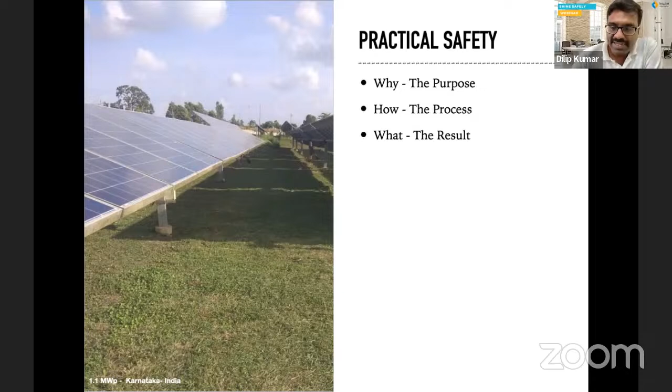I think most of us know the why. I don't have to explain why we need to have safety embedded into our day-to-day operations. The main reason is the growing install base. We have close to 71 gigawatts of installed solar PV plants, of which 80% is ground mount or utility scale solar PV plants. And most of you who have joined are aware of the challenges or different kinds of injuries that we have faced while operating solar PV plants.

We are not going to talk about safety during the construction phase. We are purely going to talk about the challenges we face post-commissioning, during the operations and maintenance life cycle of the solar PV plant. Many have spoken, and there are well-defined processes to take care of construction-related fatalities and injuries, but there is less or no focus on managing fatalities or injuries during operations of the solar PV plant.

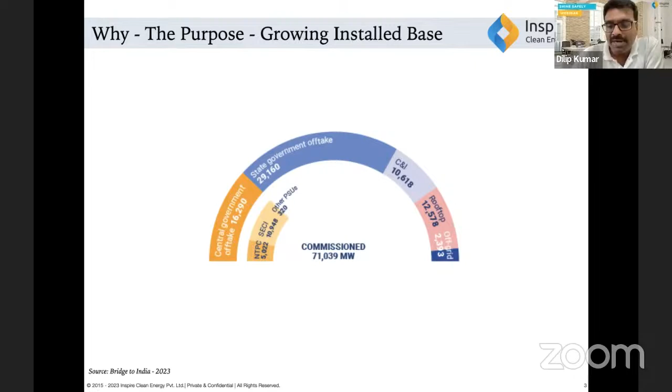So the main concern or the main purpose is the growing installed base. How do we handle the growing installed base, and how do we operate them in a safe manner?

The second major reason is that before the law comes into picture, there are suo motu cognizance being taken up, different organizations addressing unsafe work practices and accidents happening in factories, and making sure rules and regulations are formulated. So today we cannot wait for a law or a rule to come to follow safety. Either our customers are asking us to follow safety, or the fund which has invested into these solar assets is asking us to follow safety, or, just like in this case, the National Human Rights Commission sends notice to center and state asking why safety is not followed properly.

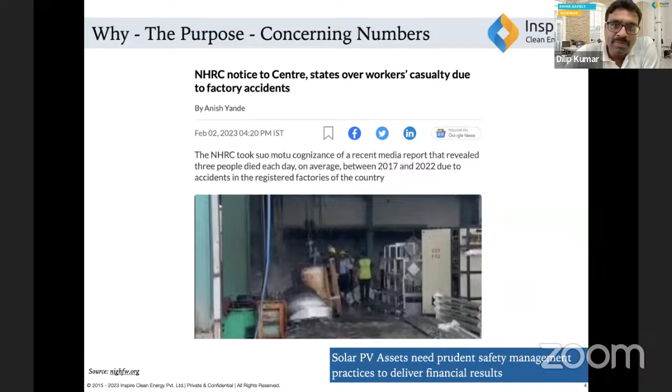So we cannot work in the normal way - chalta hai, let a rule come, us samay dekhte hai. Those kinds of philosophies don't work. We have to be one step ahead, think about tomorrow, and plan today.

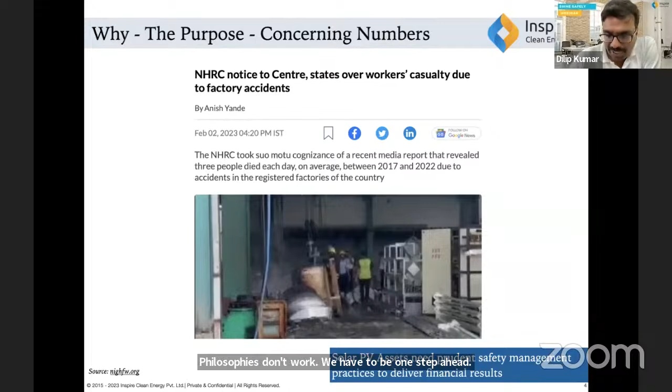In addition to this, the major challenges, work-related illnesses or injuries cost close to 12% of GDP loss. If there is a loss because of injury or illness, they are costing us in billions. Not just injuries and illness, but if a team member gets hurt or injured, the whole morale of the remaining team gets affected, the work gets affected, and the cost of disengagement is very high.

So unsafe work conditions and poor EHS policies not only lead to human loss or resource loss, but it also impacts economic viability of the project or the organization which is employing the team.

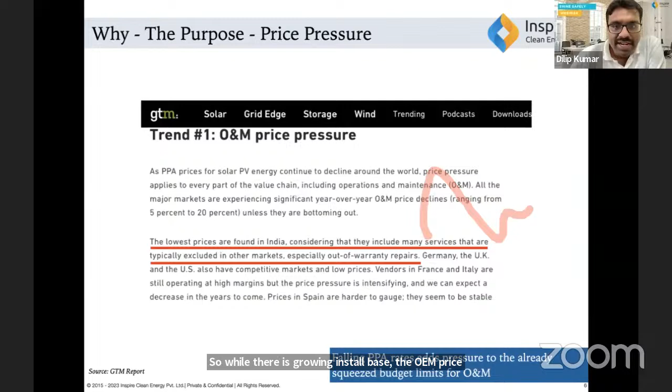So while there is growing install base, the O&M price pressure is pushing us to a situation which is very hard to manage, right? And because of that, what happens is you have safety like this.

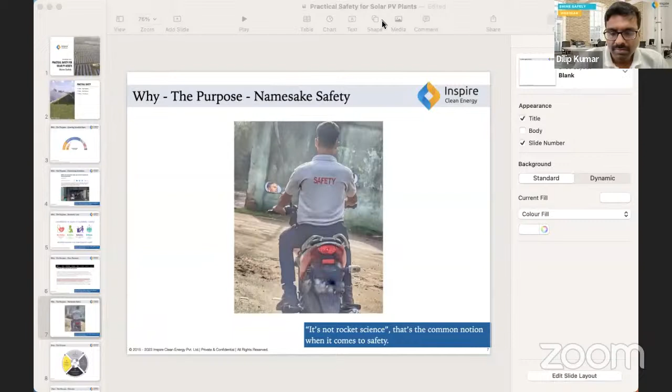Just a minute, I am not sure why this is not... I want this to go up. I hope you guys can see. Yeah, we can see, just a minute. Okay, so I'm still not able to move this guy out, I don't know why.

So anyhow, the point is because of this price pressure, safety has become a namesake entity. People are following safety just because we are forced to follow safety, or just because an audit is happening, or just because a customer is asking us to submit a set of documents. So this is a classic case.

I took this picture this morning when I was coming to the office. This young chap is well dressed, having his safety shoe on and wearing a safety t-shirt provided by the company to emphasize to him that work safety is important, work safety is important. But this gentleman forgot about the helmet. So that is how safety is implemented today in most solar PV plants. They are implemented in letter, but not in spirit.

So how do we go about this? How do we change this whole situation from namesake safety to practical safety? Most times safety is not implementable because it is not practical. So the major challenge that we have to adhere to, or we have to look at, is how do we make sure that safety is practical and deployable.

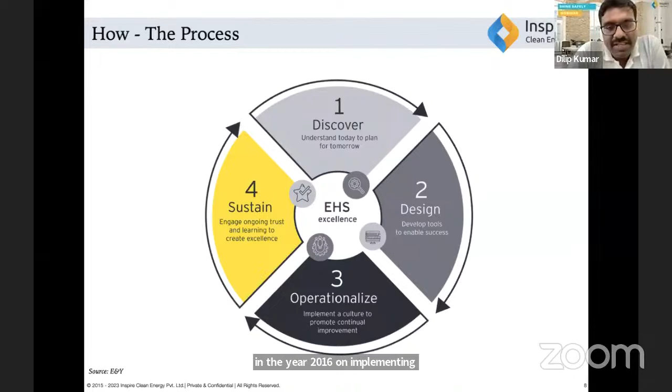So when you look for these terms, practical safety, Ernst & Young had come out with a wonderful analysis in the year 2016 on implementing occupational safety at work sites. So they gave this EHS excellence metrics, and they said every company has to go through this 4-step process, and this has to be a continuous improvement process.

They say you have to discover pains of today so that you can plan for tomorrow. You have to design processes and tools to enable that it is successful, that is, it is not namesake, but it is successful. Just not penalizing, but enticing team members to follow it. Third, to operationalize it and make it as a culture and habit, rather than having a safety policy stuck in a place where nobody has a clue about what the policy means, what the word means, and what is the essence of it. Make it operationalized.

And fourth is to sustain them by continuous learning, training processes, and identifying new hazards or new challenges or loopholes in the existing system so that we can be better. This is the process EY shared as part of their reporting as EHS excellence in the year 2016.

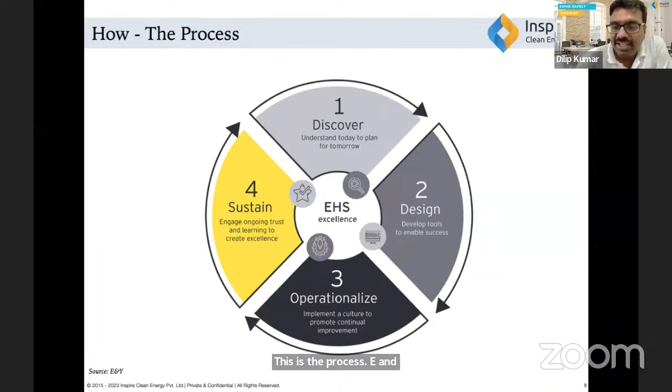And we took this survey before we started this webinar plan, and we asked the industry: what is the major challenge you see? What is the major reason for an accident in a solar PV plant? I guess most of you, even in this participant list, would say it is DC, which is most hazardous.

So that is where the major challenge is. When you don't understand where a hazard exists, then how will you plan or strategize your safety policy or your safety processes to avoid the hazard? So this was a major eye-opener for us when we implemented EY's EHS excellence into ICE operations.

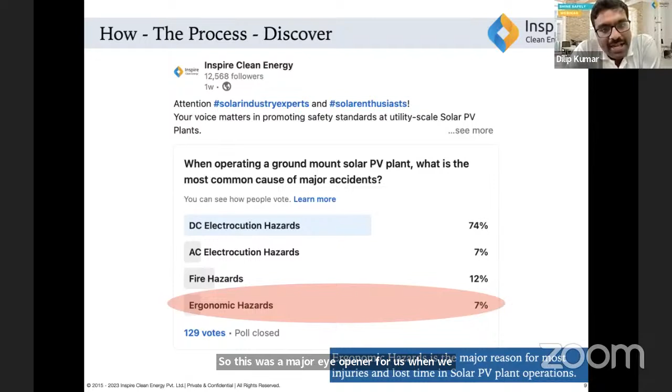So we brought in this methodology, hierarchy of controls. Most safety professionals are aware of this hierarchy of control: elimination, substitution, engineering control, administrative control, and PPE. But the important essence in this hierarchy of control, which most miss, is the effectiveness of them.

As clearly shown in this diagram, elimination is the most effective method of removing a hazard, and PPE has the least effectiveness in protecting you from an injury or hazard at site.

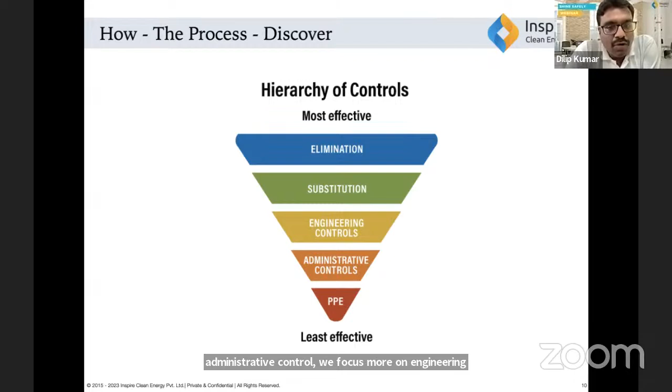Unfortunately, we are doing this pyramid in exactly the opposite way. We focus more on PPE, we focus more on administrative control, we focus more on engineering controls, and we don't focus on substitution and elimination.

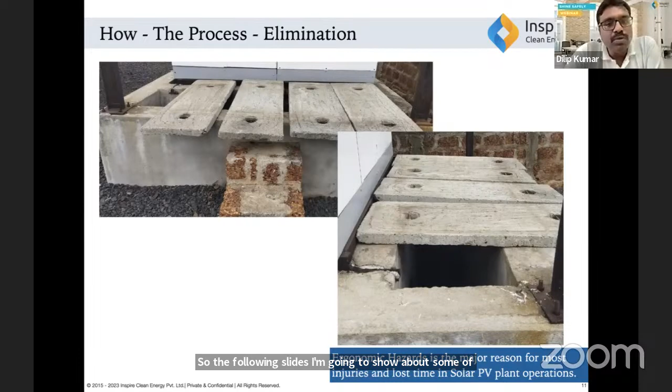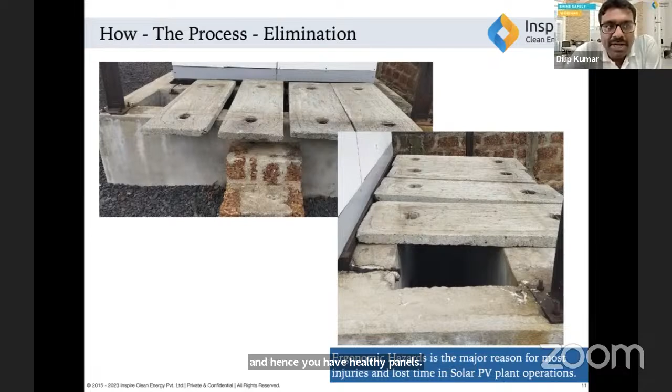So the following slides, I'm going to show some of the ergonomic hazards which are causing problems at utility sites. You would have seen such installations where you have a trench where you have put up the central inverter or the LT panels. Nowadays most utility plants have string inverters, and hence you have LT panels. You don't have enough space for the team to do preventive maintenance or corrective maintenance.

These injuries, these hazards can be easily managed when the solar plants are designed properly. You can look at this picture: the footstep size is so small that a person carrying a tool cannot walk on it or step on it stably and reach up to the platform.

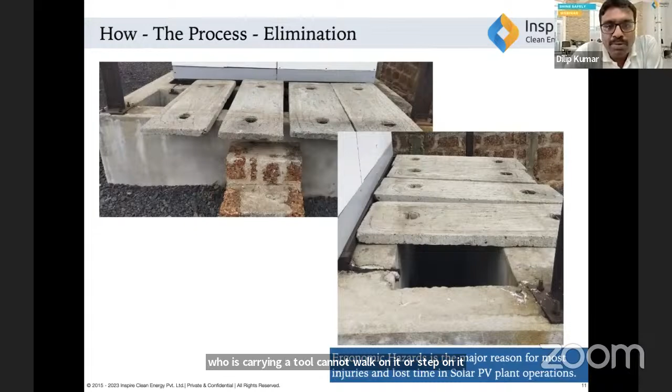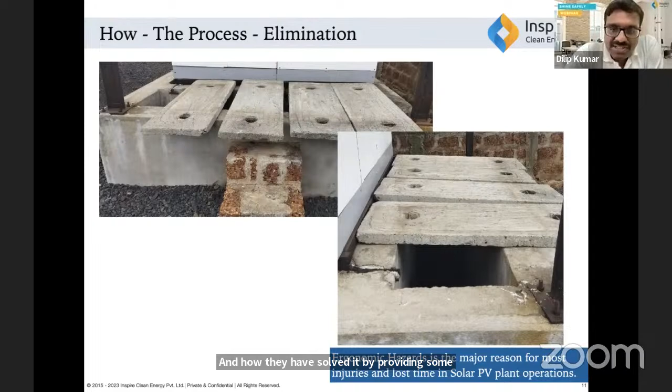And how have they solved it? By providing some slab, which is again much more dangerous. So the biggest challenge is to eliminate these hazards during the construction phase or the design phase itself.

And most of you would have seen such installations with string inverters becoming popular in utility scale plants. They are installed below the tables, and there is not enough space to do regular corrective or preventive maintenance.

Say, for example, if you send a team to do string current measurement, how will they do it here? There is no visibility of which string they are measuring, whether those strings are open, whether those strings are properly connected. They will connect the clamp meter, and when they accidentally shake it, there is a possibility of a short circuit, which is going to cause a fire or a DC electrocution.

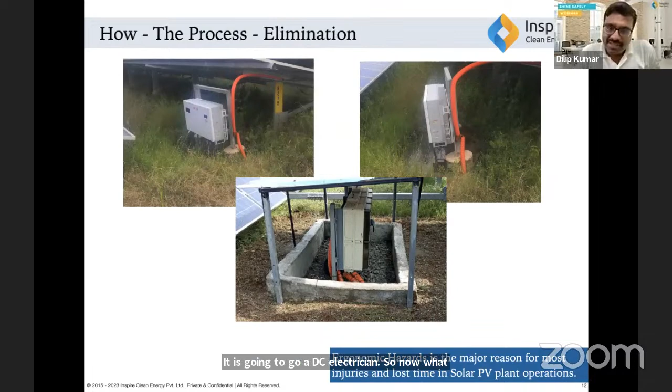So now you will say DC electrocution is the biggest hazard, but actually it is the ergonomics which has caused the DC electrocution hazard to occur. So this common sense approach of looking at the challenge is very important in having practical safety implementation at site.

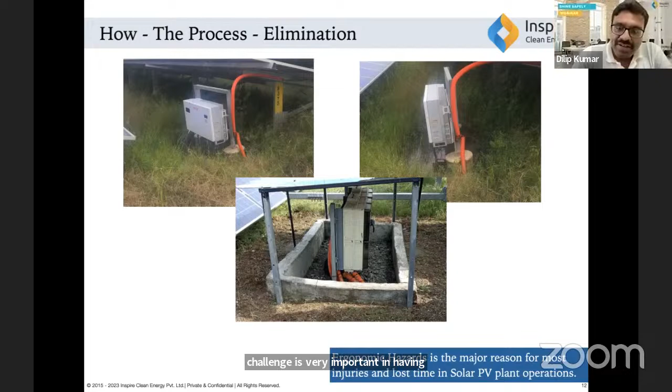The second most important activity done in a solar PV plant is vegetation management. Here you cannot take elimination as a route at all; the only possibility is to use substitution. Most times you see laborers manually cutting or removing vegetation to control the abatement.

Instead of going for easier methods which could reduce the hazard, we don't use them. We simply want to deploy more resources and cover it, or in the worst case, we spray chemical weedicides and make the environment much more polluted. So methods like easier, environmentally friendly substitutions are not being considered in solar PV plants.

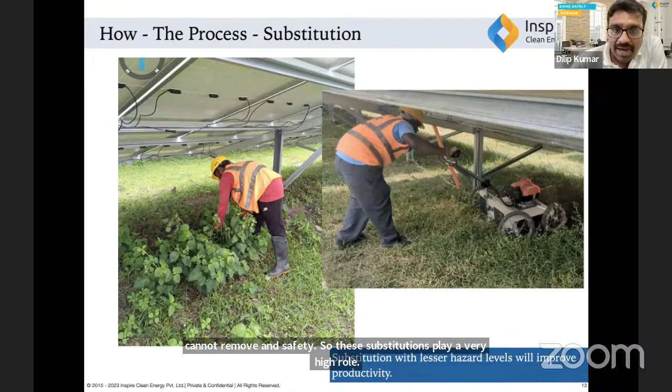So these substitutions play a very high role. It will improve productivity. The team morale will be high if you look for such substitution.

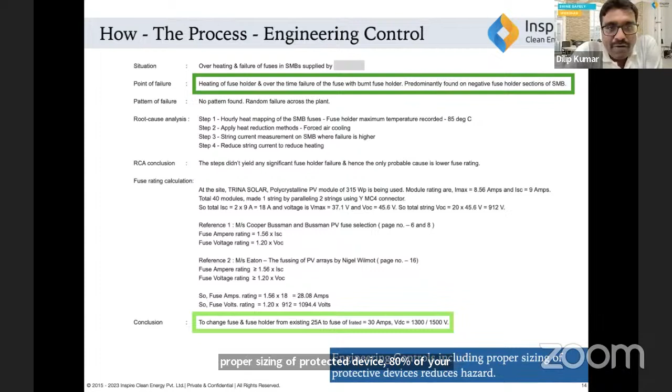The third most important hierarchy of control is engineering controls. Most times you have DC problem and AC problem because of improper sizing of a protective device. You have an improper MCCB, an improper sized cable, an improper sized fuse, or improper crimped MC4 connectors. If you have proper sizing of the protective device, 80% of your DC and AC side faults can be eliminated, along with DC and AC hazards.

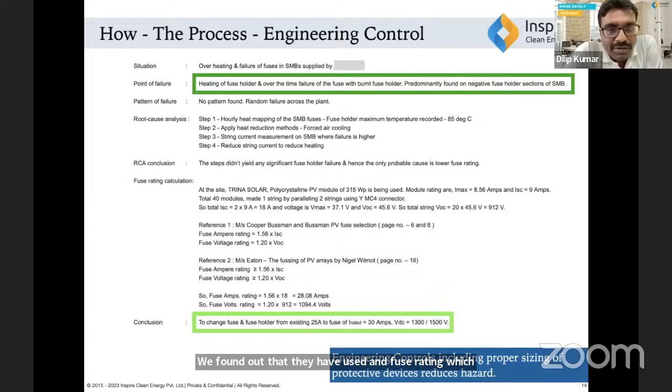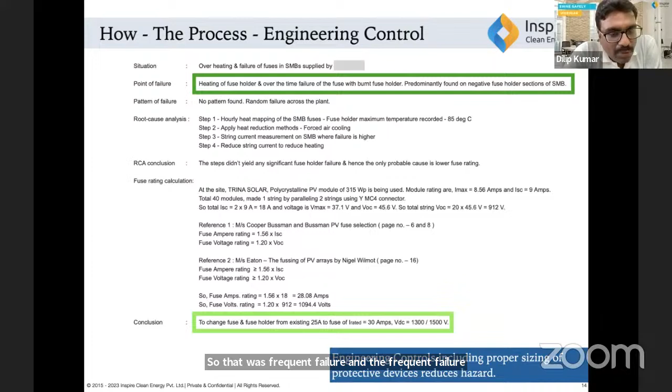This is a classic case of a new project which we took over as operations and maintenance team. We found that they had used a fuse rating lesser than the actual rating needed for the system. So there were frequent failures, with the fuse holder burning. If you don't attend to it with a technical mindset, one day the whole SMB will go on fire and we will say it is a DC hazard. Actually, it is not a DC hazard. It is an improper engineering control hazard, which has led to a DC side problem.

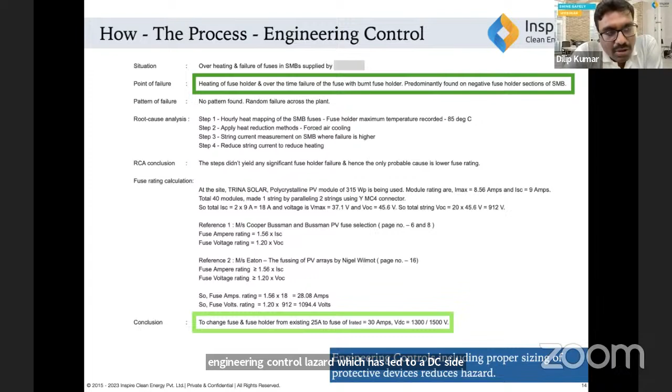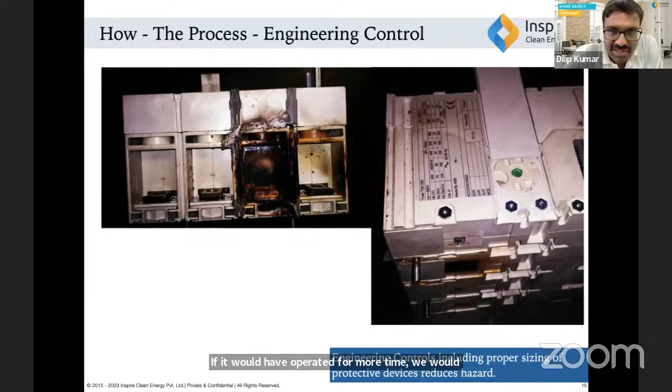So proper engineering control can reduce most of the challenges in a solar PV plant. Yet another example is undersizing of an MCCB. Here, a particular phase contact is completely burnt. If it had operated for more time, we would have seen a major AC side arcing. These are hazards which can be easily avoided with proper engineering control.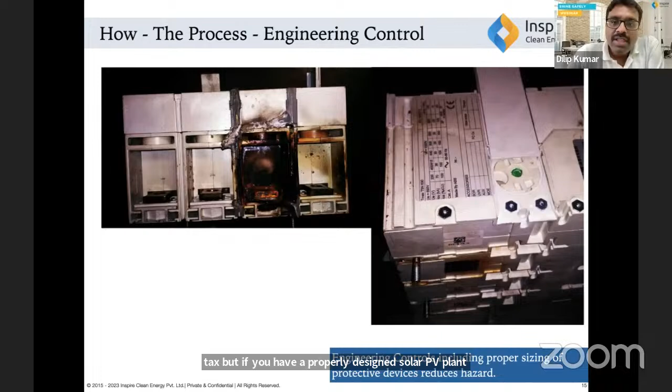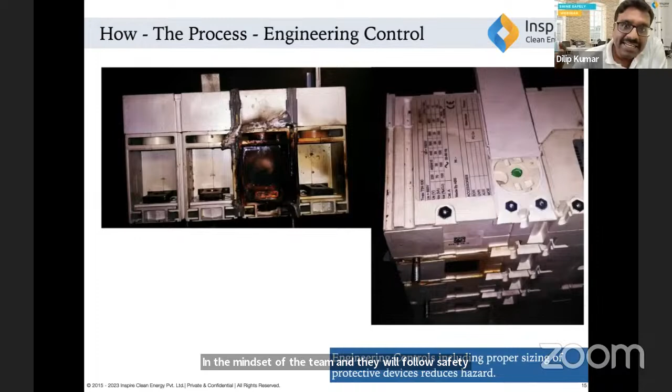The moment we talk about engineering control in safety, the first name that comes is LOTO. Yes, LOTO is an engineering control, but it is predominantly an administrative control assigned to teams to follow. You still don't have control over whether your team will follow it or not. There is a possibility that because of emergency or urgency, they miss putting a LOTO tag. But if you have a properly designed solar PV plant, with properly designed MCCB or fuse, the number of incidences where you have to use a LOTO tag itself will come down, and that urgency won't be in the mindset of the team, so they will follow safety protocols properly. That's how practical safety comes into picture.

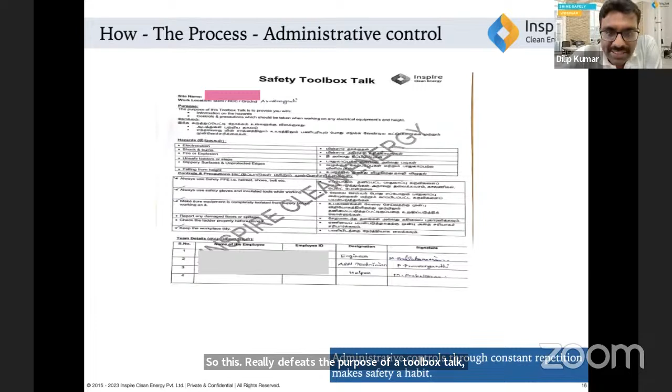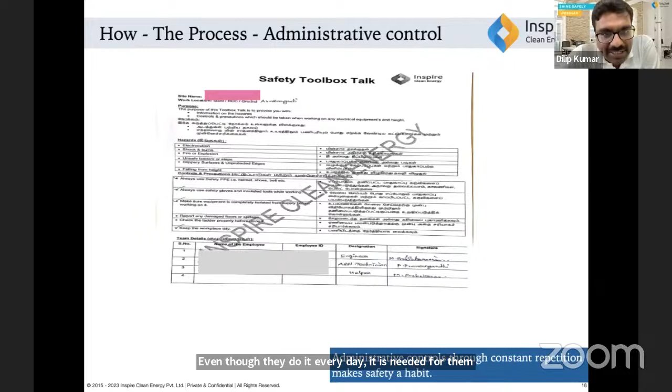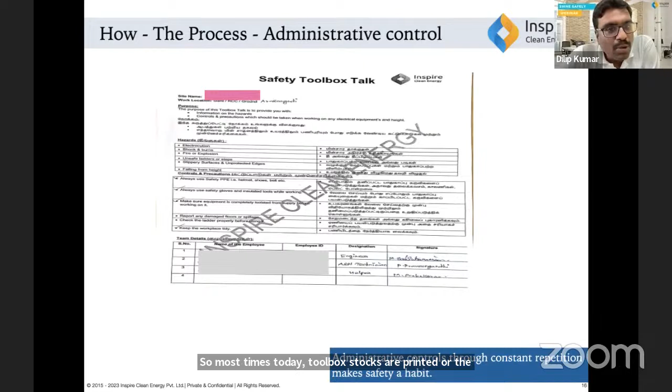Yet another case on administrative control. Everybody talks about work permits, toolbox talks, and whatnot. Before we started implementing our EHS excellence, we printed out safety toolbox talks and asked the team to sign it. This really defeats the purpose of a toolbox talk, right? A toolbox talk is meant to discuss the hazard, why it has to be done, what the hazards are, what controls and precautions you have to take, and then the team understands and agrees to it. Even though they do it every day, it's needed for them to repeat it so it becomes a habit. By printing this, the whole purpose has been defeated. So most times today, toolbox talks are printed, or done for namesake without any clarity on why a toolbox talk is being performed.

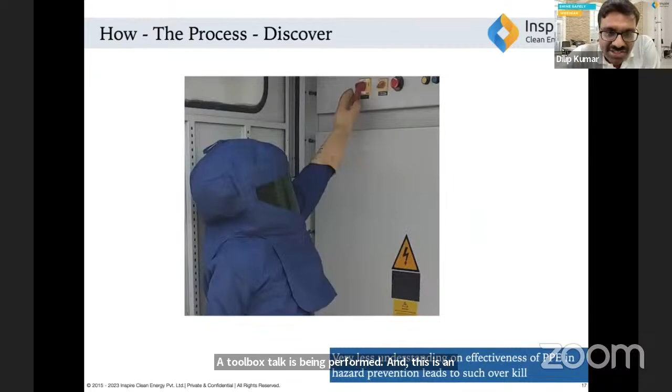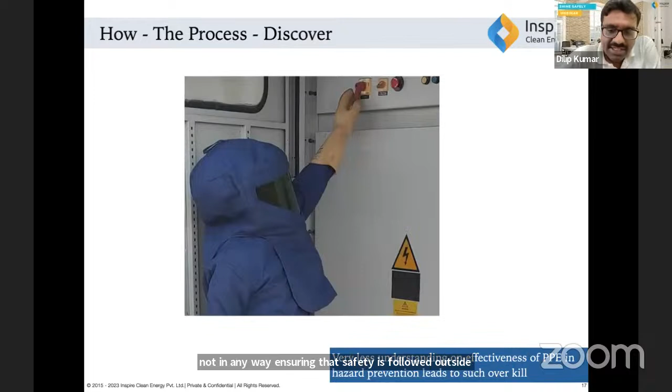And this is a new challenge we are getting now: overkill of PPE. An arc suit is given and the team has to operate with the arc suit in an LV panel or a medium voltage panel which is not even live. The whole purpose of an arc suit, and what kind of arc suit needs to be provided, is defeated. When you give such personal protective equipment, the team will use it only when an audit is happening, or only when you are present, or they will wear the arc suit, click a picture, submit it to you, then remove the arc suit and do the work in a normal way. It is not helping them, it is not practical, and it is not ensuring that safety is followed at site. So a very less understanding of the effectiveness of PPE is also causing challenges in implementing safety.

So how we approached it: the Shine Safely philosophy took the whole approach into 4 steps: defining a policy, assessing each site at regular intervals, measuring key performance indicators, and continuous improvement. Under our Shine Safely program, we developed a practical safety framework where we kept the team members at the core of the policy. What will entice the team member to follow a policy?

How they can make sure that they themselves will be able to follow that policy without regular hammering, so they understand the value of the policy. Second is to make assessment.

These assessments are done by teams which are operating it. We have an HSE team, but still there are single point owners at each site who do the assessment, which comes to the HSE team for verification, because most times the HSE team has lesser working knowledge on the hazards available. So effective hazard identification and elimination is being assigned to the team which works there.

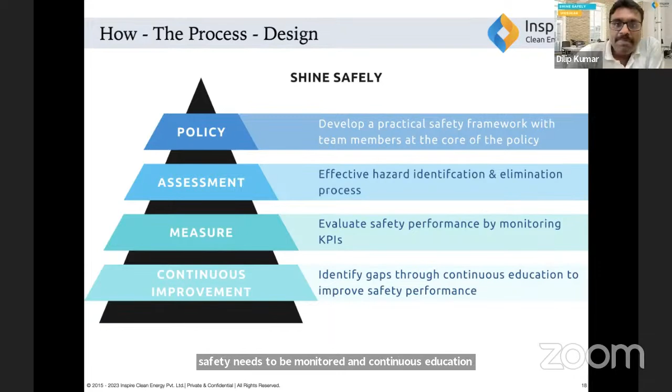And an effective KPI, what needs to be monitored? What are the parameters that need to be monitored? Is it only deviation, or is it complete follow-up of it? All those parameters which are critical to improve safety need to be monitored, and continuous education, continuous training to understand the new problems that may come at the site is needed.

So this is one clear picture that we show to our teams when it comes to safety, because just like how you see the whole F1 team replace the wheels, refuel, everything in microseconds—less than a second, they do all this—it is possible only with this 20-member team working in complete coordination. So if you want your plant to be operating safely, you need all the team members, starting from management to the support staff doing cleaning of your premises, to also be part of this whole program. Otherwise, it is not possible.

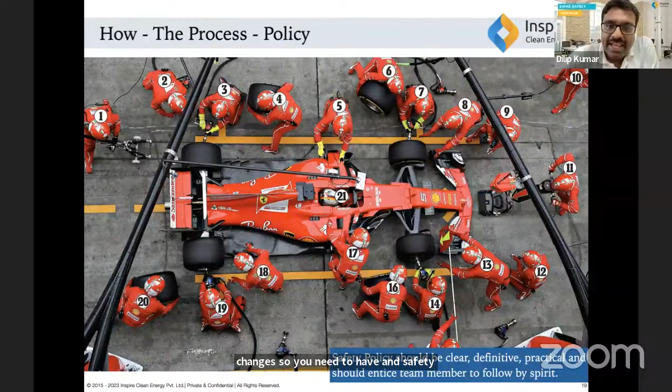Here also, the driver, who is number 21, needs to come and brake at the exact location. If he brakes 1 meter before, 100 meters before, or 100 centimeters before, the whole stuff changes. So you need to have a safety policy which entices the team members so that they follow it by spirit and not just for the sake of following it.

Examples that we have done: whenever we take over a solar plant, we do a complete assessment. As I said, the team members assess it. Most times you have documents saying something, and in the field there is something which would cause a problem. We cannot simply go by the assurance that the plant has been operating for 2 years, 3 years. We cannot go by the same mechanism.

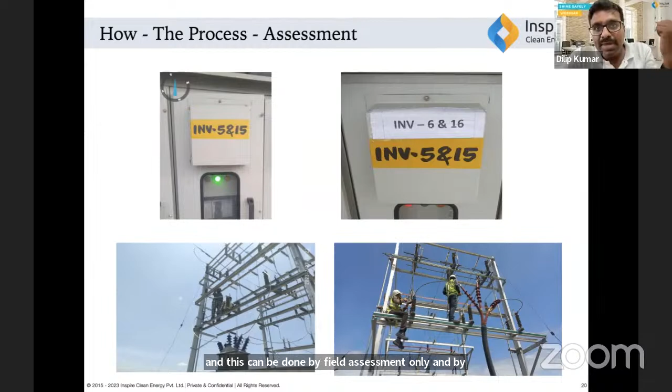For example, in the top picture, the LT panel breakers were named for inverter 5 and 15, but actually they are connected to inverter 6 and 16. Imagine a situation where there is a fault in inverter number 5. The team goes, looks at this nomenclature, switches off the breaker, goes and checks in the field, and the inverter is still live, right? So these kinds of situations need to be removed, and this can be done by field assessment only, and by enabling the team members by spirit so that they can do the assessment.

Same way, KPIs—many have lesser understanding on near misses. Near misses are simple cuts, trip falls; these are also monitored by our team, along with physical strains that our team goes through, like dizziness, fever, diarrhea, stomach pain, or eye irritation. All these incidents are monitored so that we can understand what activity is causing what—is it climatic condition, is it a site-related condition, or is it a block-related condition—so that we can improve the work methodology for them and help them with better procedures so they can do it.

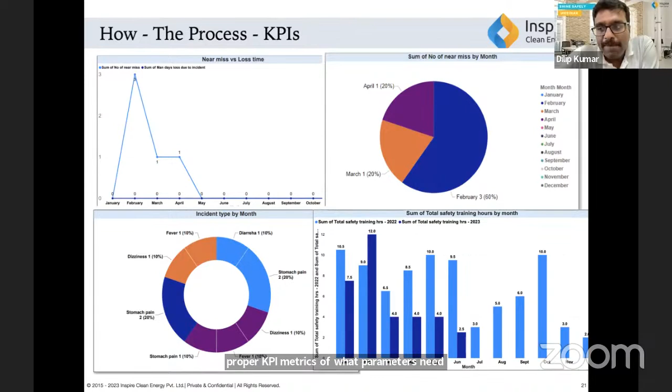And as I said, continuous training is the only way to improve and make it a habit. Monitoring how many hours each of the team members have been trained, and what is the procedure and calendar to maintain that training, also needs to be logged. So you need a proper KPI metrics of what parameters need to be monitored, and what needs to be given back to the team members is also important.

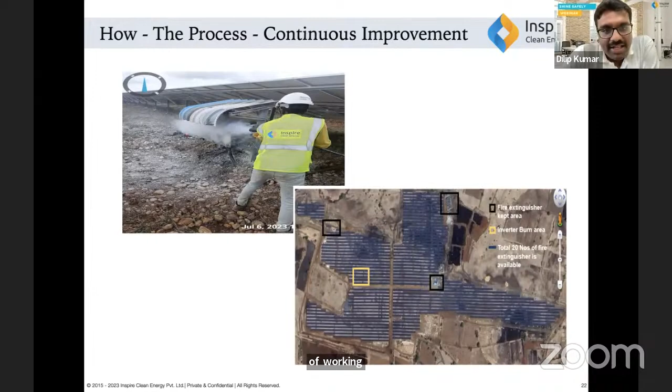Another classic case of working with assessment and continuous improvement as key: for example, traditionally, unlike a factory, you don't have proper signages. When there is a fire, most times the team members do not know where to go and fetch the fire extinguisher. So whenever we take over assets, we do a mapping of where the fire extinguisher is and how far it is. Once we understand—let's say this particular incident which happened on July 6th—then we reassess: hey, we need to have one more fire extinguisher at a nearby location, because it is causing more time. So this gives more confidence to the team that yes, there is a serious concern on safety, and there is a serious concern on how I implement the safety.

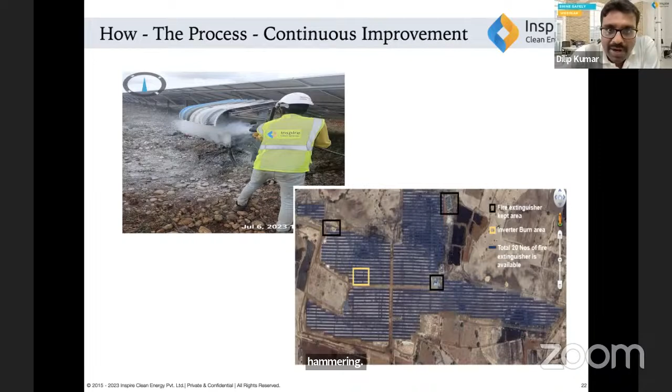It is not just namesake. That is very key, because if you continuously provide indicators to the team, they are looking at it, and it makes my life easy to use safety, they will follow safety without hammering. So these kinds of continuous improvement techniques are required to ensure safety is implemented better at your site.

And what happens when you do them? What happens when you follow the EHS excellence model? You will see such overall performance evaluation improving.

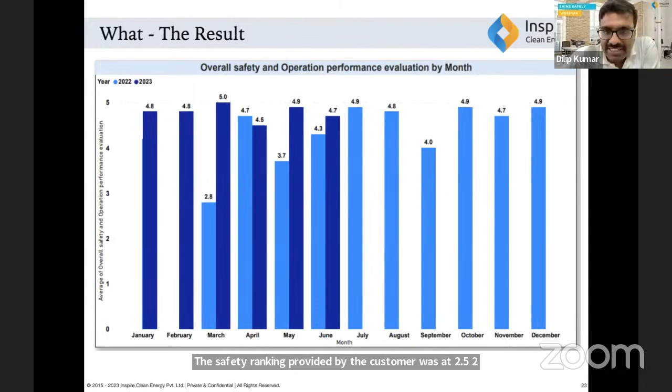This is a project we took over in March 2022. The safety ranking provided by the customer was at 2.5, 2.8. By continuous implementation of the Shine Safely program, we have consistently improved the performance ranking with this customer, and we have continuously gone above the benchmark and met the complete evaluation requirement of the customer.

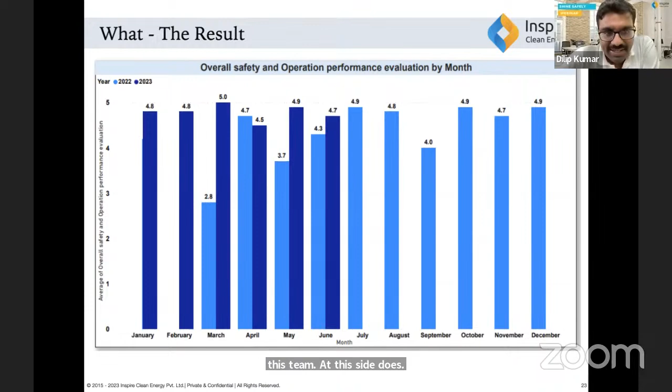So if you do it right, you can see real value. Now this team at this site does safety assessment, comes back with a continuous improvement program on how to handle hazards, how to identify hazards, and helps us ensure we keep getting the top mark in safety performance.

So that's all about safety, the Shine Safely program. Inspire, we started in 2015 with a 100 kilowatt plant, and today we have served close to 2 gigawatt assets in India. We focus on making sure the whole life cycle continues to be green while operating the solar power plant.

We focus on ensuring that the total cost of ownership of managing a solar power plant is the lowest. And we keep creating standards for the industry so that they can follow and implement them, so that the whole industry grows together. These are our key areas.

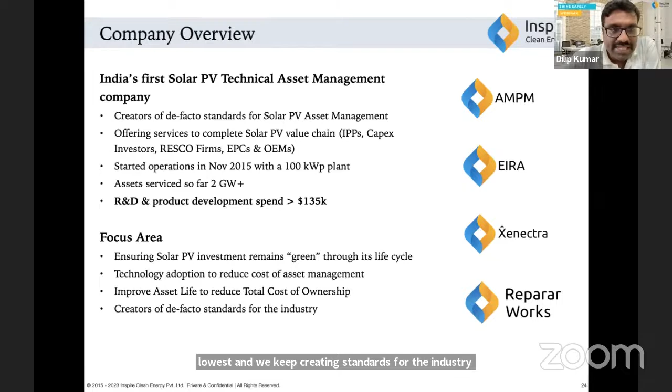Our solutions are comprehensive care, wherein we provide robust software, warranty management, insurance management, everything covered, so that the customer has 100% peace of mind and a fixed annual O&M budget.

We also work on repair. You can get your inverters repaired from us, and you can get an inverter protection plan from us. Any warranty support or inverter replacement support will be provided by us. It's a third-party warranty protection plan for your inverters, with more than 1,000 different unique spare parts and tie-ups with OEMs. We are better positioned to provide inverter repair, inverter replacement, and inverter salvage solutions for your projects.

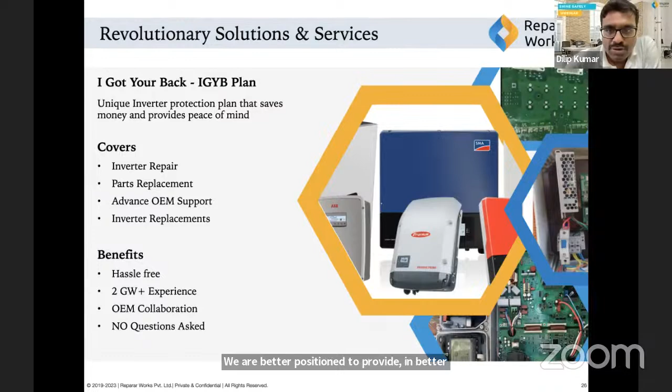Another program we conduct is Jugni. Our idea is to provide at least 1 billion women with 500 watt to 1 kilowatt DIY solar kits made from old solar panels and old inverters. You would have seen, after the end of life of most projects, what needs to be done.

There are many cases where solar panels have some issues and are not properly repurposed. Under Jugni, we want to repurpose such old equipment and provide economically viable solutions to poor women across the globe. It's a global initiative, with team members from 18 countries part of it, and we are proud to represent it here in India.